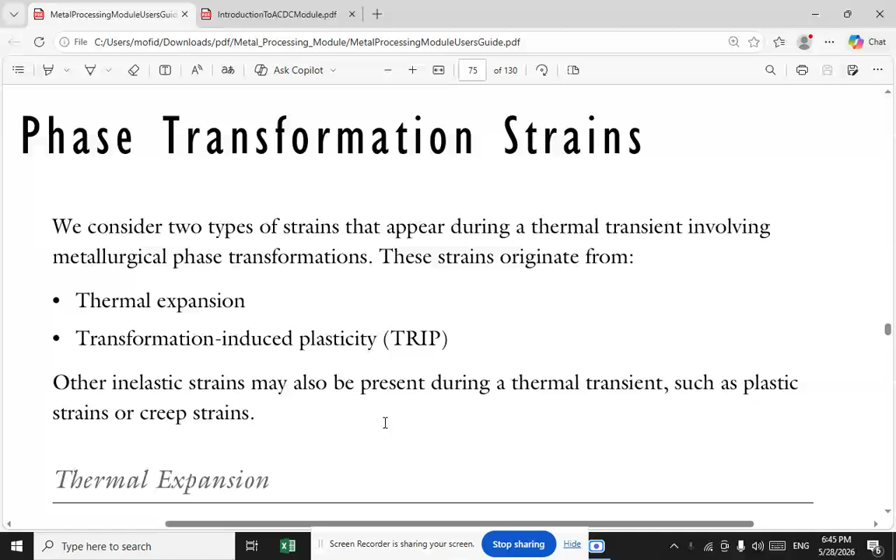We consider two types of strains that appear during a thermal transient involving metallurgical phase transformations. These strains originate from thermal expansion and transformation-induced plasticity. Other inelastic strains may also be present during a thermal transient, such as plastic strains or creep strains.

Now I want to go through thermal expansion. It is well known that different metallurgical phases occupy different volumes at a given temperature. For example, when austenite transforms into martensite, the thermal contraction due to cooling is accompanied by a volumetric expansion when the martensite begins to form.

There are two formulations for computing thermal strains in the compound material. The strain-based formulation uses a phase fraction weighted sum of the thermal strains of each phase. The density-based formulation uses the change in density during temperature change and phase transformation.

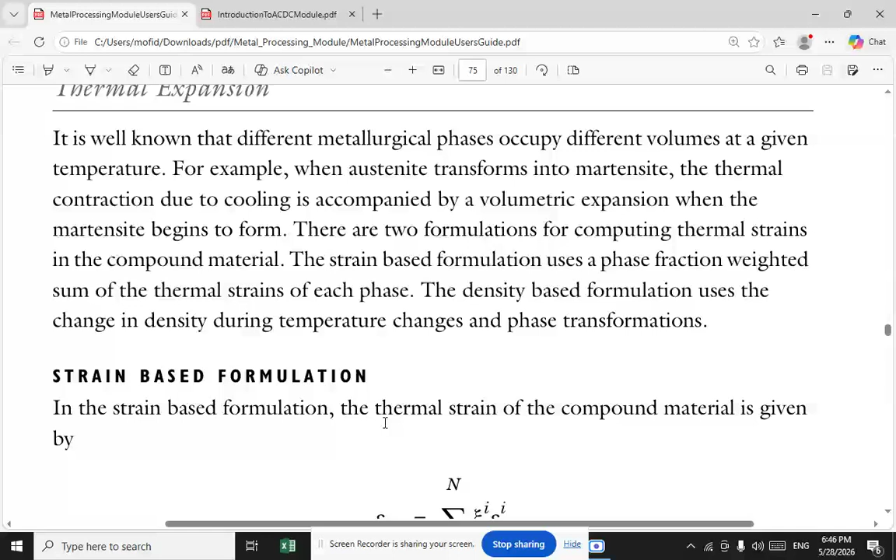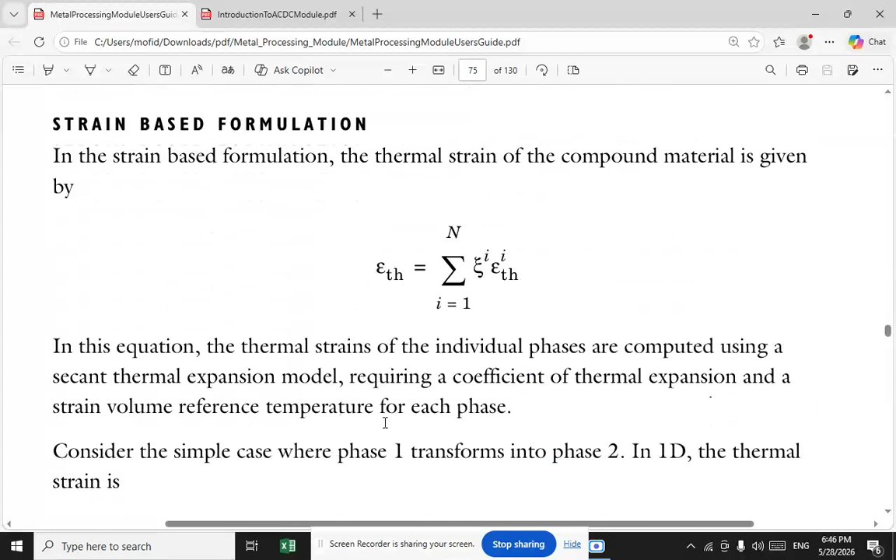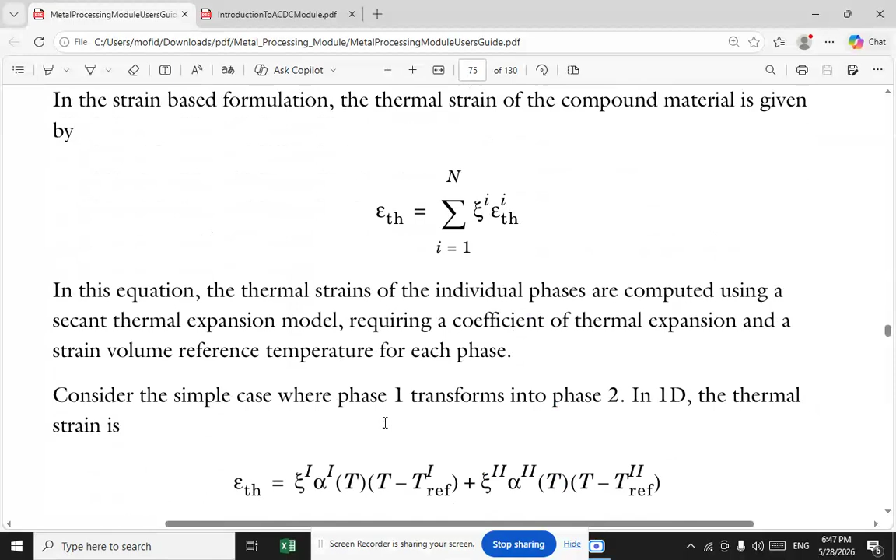Now I'm about to go to the strain-based formulation. In this formulation, the thermal strain of the compound material is given by epsilon TH, equal to the sum from I equals 1 to n of xi to the power of I times epsilon TH to the power of I. In this equation, the thermal strains of the individual phases are computed using a secant thermal expansion model requiring a coefficient of thermal expansion and a strain volume reference temperature for each phase.

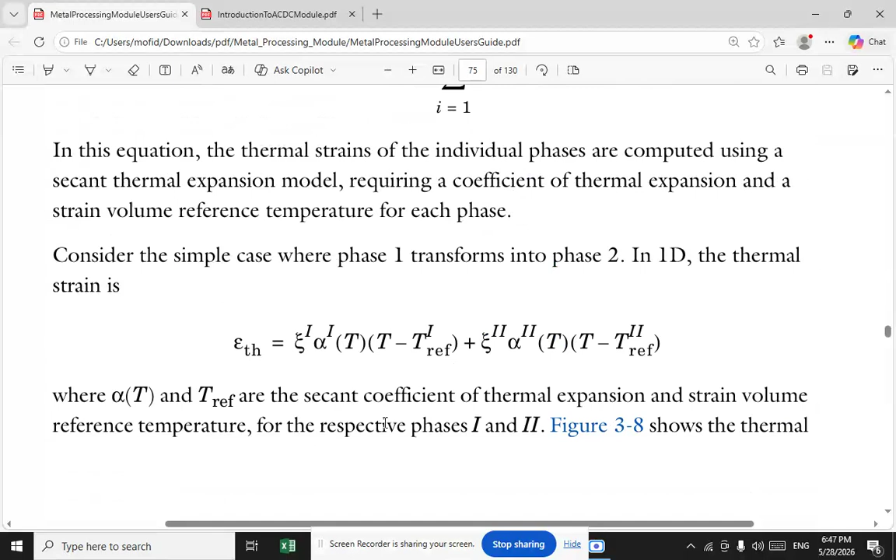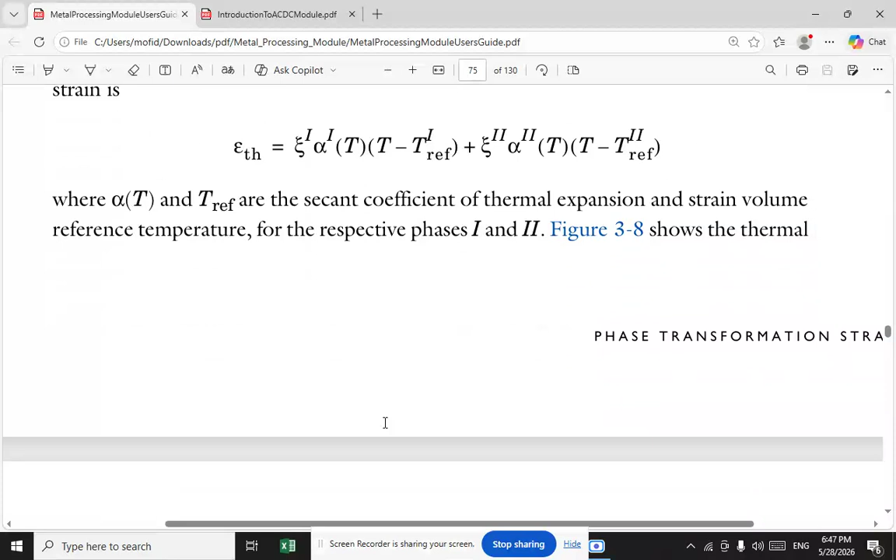Consider the simple case where phase 1 transforms into phase 2. In one dimension, the thermal strain is as below, where alpha T and T temperature reference are the secant coefficient of thermal expansion and strain volume reference temperature for the respective phases 1 and 2. Figure 3-8 shows the thermal strain. For simplicity, the coefficients of thermal expansion for the two phases in the figure are constant but different.

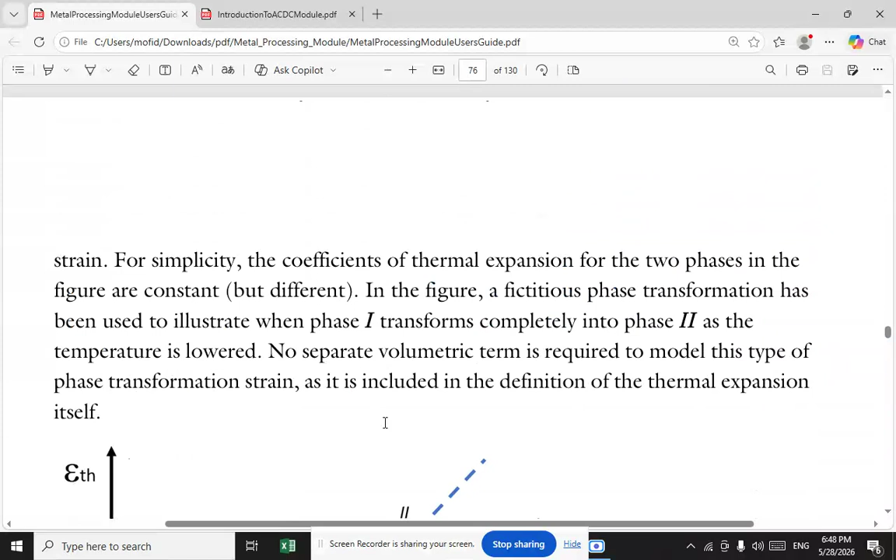In the figure, a fictitious phase transformation has been used to illustrate when phase 1 transforms completely into phase 2 as the temperature is lowered. No separate volumetric term is required to model this type of phase transformation strain, as it is included in the definition of the thermal expansion itself. Figure 3-8 illustrates the strain-based formulation for the thermal strains.

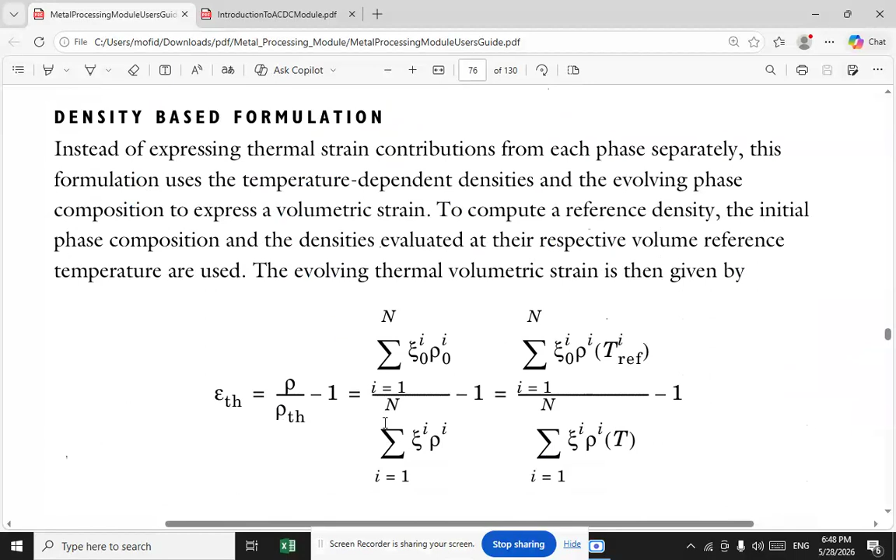Now I want to go through the density-based formulation. Instead of expressing thermal strain contributions from each phase separately, this formulation uses the temperature-dependent densities and the evolving phase composition to express a volumetric strain. To compute its reference density, the initial phase composition and the densities evaluated at their respective volume reference temperature are used. The evolving thermal volumetric strain is then given by this formulation.

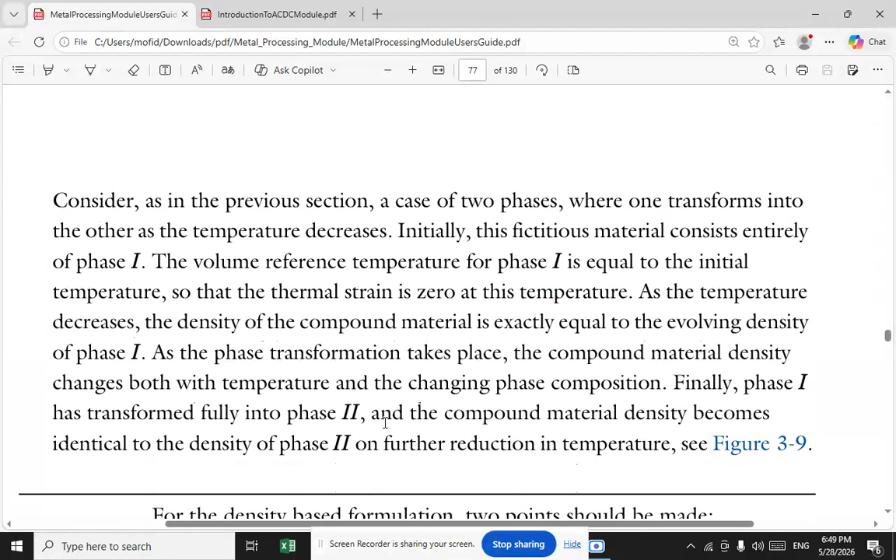Consider, as in the previous section, a case of two phases where one transforms into the other as the temperature decreases. Initially, this fictitious material consists entirely of phase 1. The volume reference temperature for phase 1 is equal to the initial temperature, so the thermal strain is zero at this temperature. As temperature decreases, the density of the compound material is exactly equal to the evolving density of phase 1. As the phase transformation takes place, the compound material density changes both with temperature and the changing phase composition. Finally, phase 1 has transformed fully into phase 2, and the compound material density becomes identical to the density of phase 2 on further reduction in temperature.

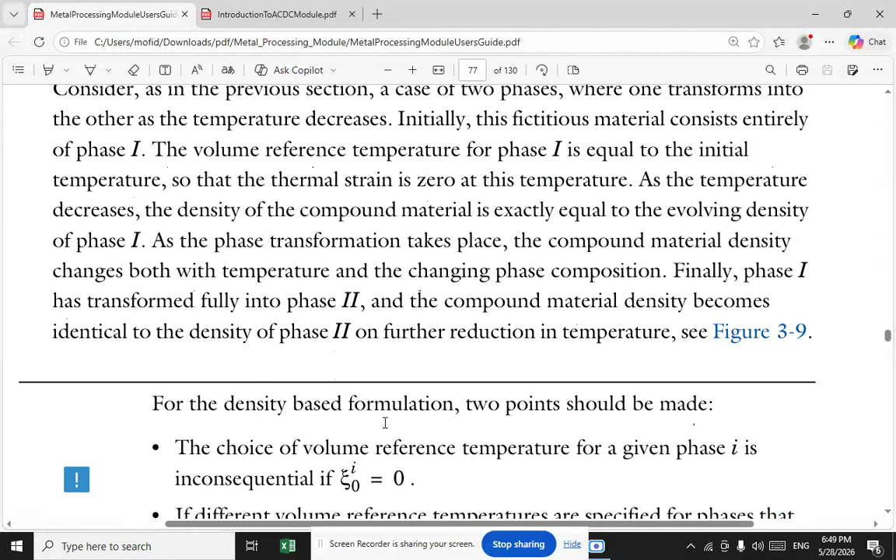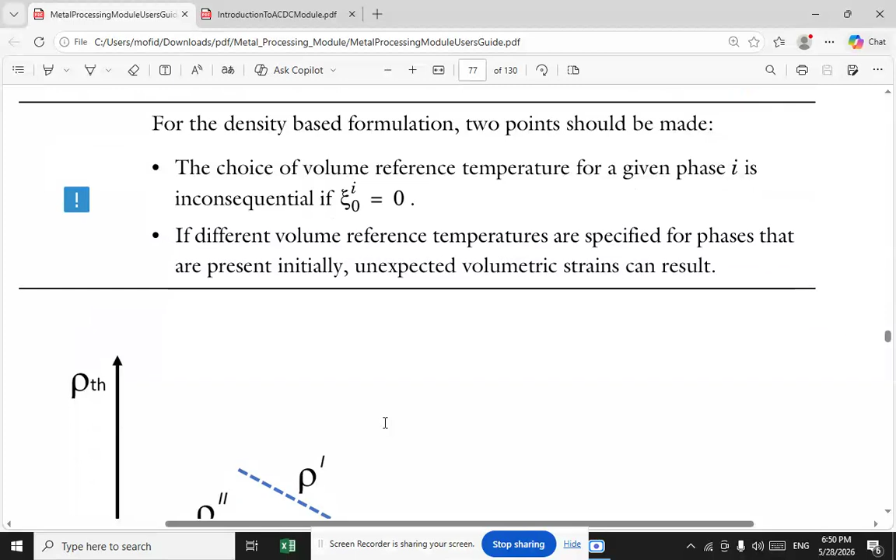See figure 3-9. For the density-based formulation, two points should be made. The choice of volume reference temperature for a given phase I is inconsequential if xi zero to the power of I is equal to zero. If different volume reference temperatures are specified for phases that are present initially, unexpected volumetric strains can result. Figure 3-9 illustrates the density-based formulation for thermal strains.

Now I want to go through transformation-induced plasticity. Plastic strains in metal result from deviatoric stresses that exceed the yield strength of the material. However, during phase transformations, inelastic strains may appear already at smaller stress levels. This transformation-induced plasticity, or TRIP, is therefore different from classical plasticity in that it doesn't involve a yield criterion, and it appears at a stress level that would otherwise be insufficient to cause plastic straining, even in the softest of the phases.

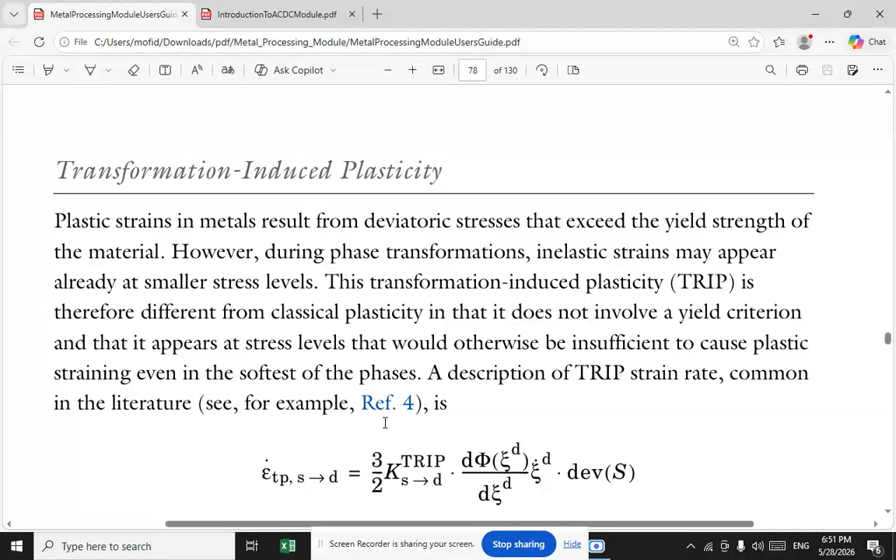A description of TRIP strain rate is common in the literature, see for example reference 4, and the formulation is such that the strain rate is proportional to the deviatoric part of the second Piola-Kirchhoff stress tensor S, through the transformation-induced plasticity parameter K, raised to the power TRIP.

The derivative of the saturation function phi xi to the power of d and the rate of formation of the destination phase xi to the power of d values for the transformation induced plasticity parameter K s tends to d to the power of TRIP will depend on the type of the phase transformation. It can depend, for example, on carbon content and temperature. See reference 5 and reference 6.

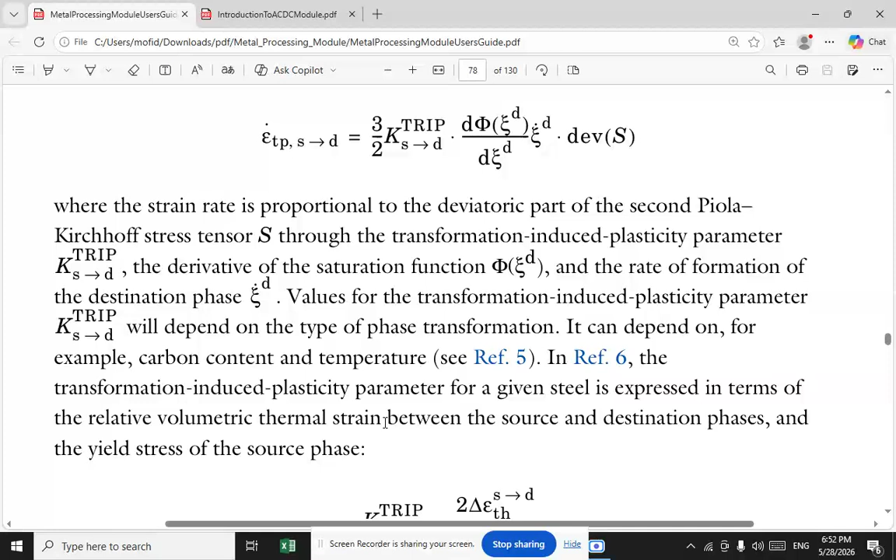The transformation induced plasticity parameter for a given steel is expressed in terms of the relative volumetric thermal strain between the source and destination phases and the yield stress of the source phase. The strain term in the expression above is the axial thermal strain difference between the source and destination phases in terms of the temperature-dependent densities of the source and destination phases.

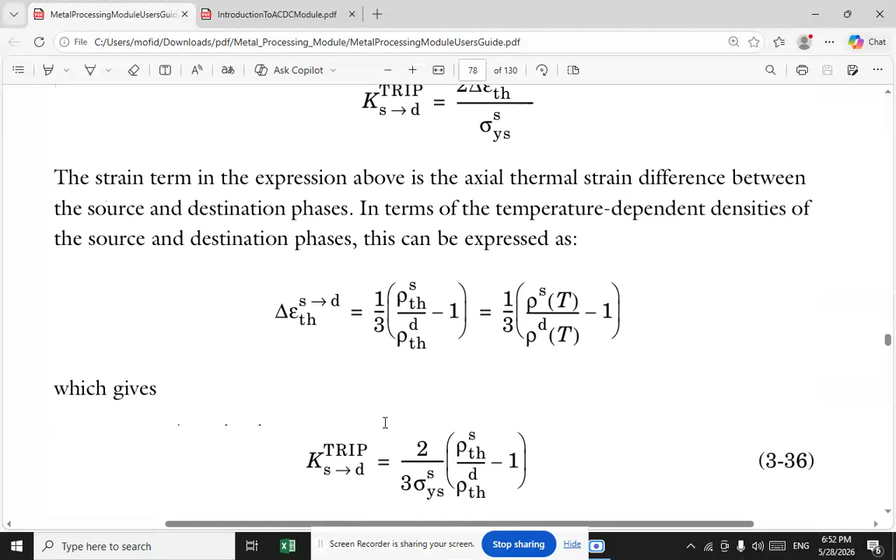This can be expressed as follows, which gives K s tends to d to the power of TRIP is equal to 2 divided by 3 multiplied by sigma ys to the power of s multiplied by rho to the power of s divided by rho to the power of d, minus 1.

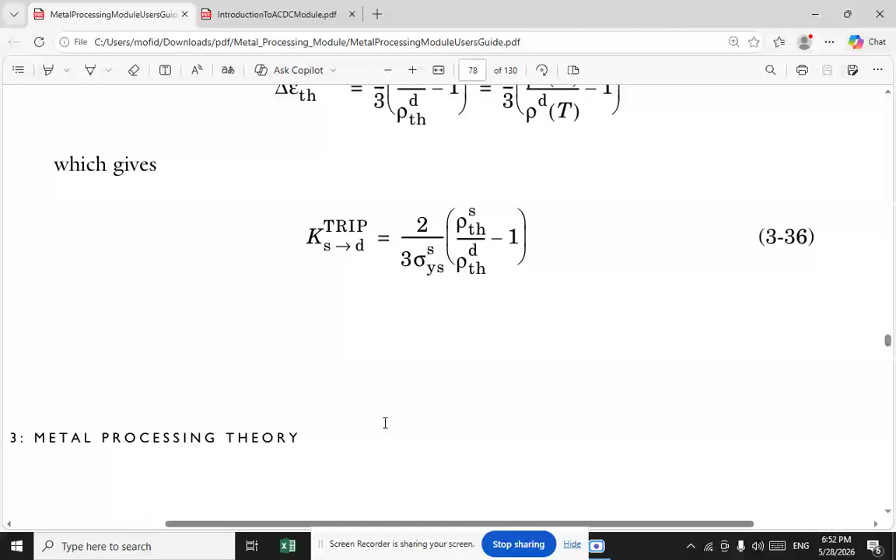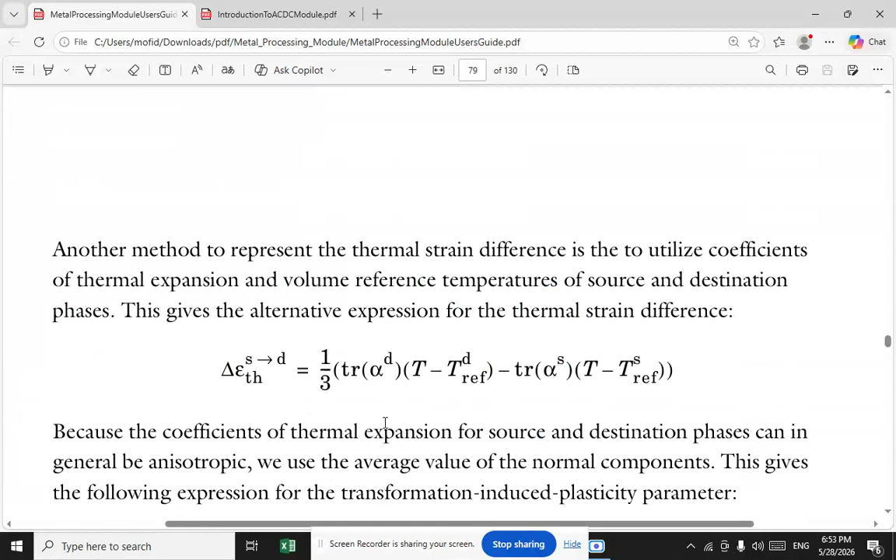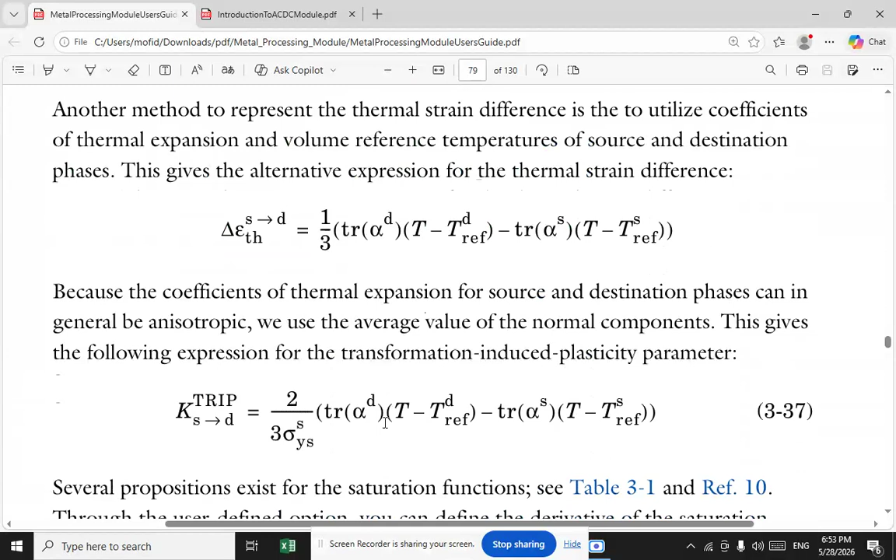Another method to represent the thermal strain difference is to utilize coefficients of thermal expansion and volume reference temperatures of the source and destination phases. This gives an alternative expression for the thermal strain difference, because the coefficient of thermal expansion for source and destination phases can in general be anisotropic, we use the average value of the normal components. This gives the following expression for the transformation-induced plasticity parameter.

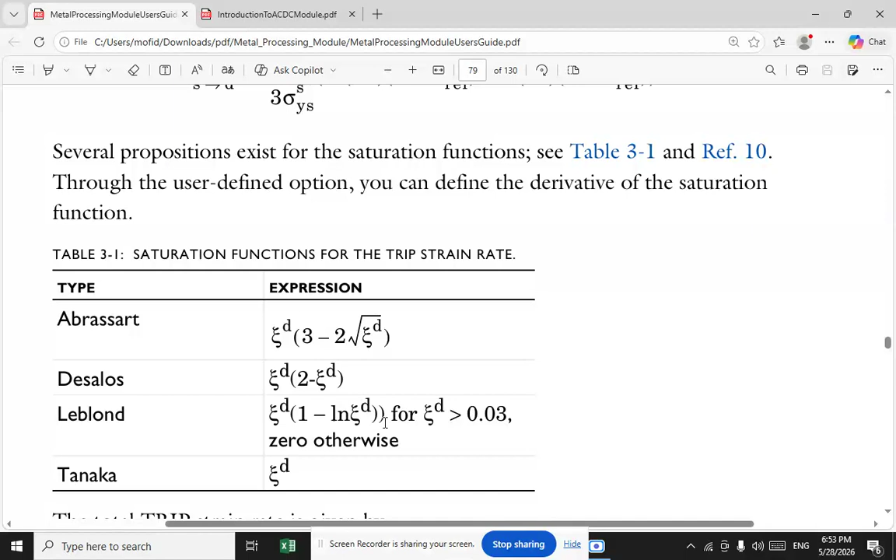Several propositions exist for the saturation functions, table 3-1, and reference 10. Through the user-defined option, you can define the derivative of the saturation function. Table 3-1 illustrates saturation functions for the trip strain rate. The type is Abrassart and the expression is such that there are also other types available.

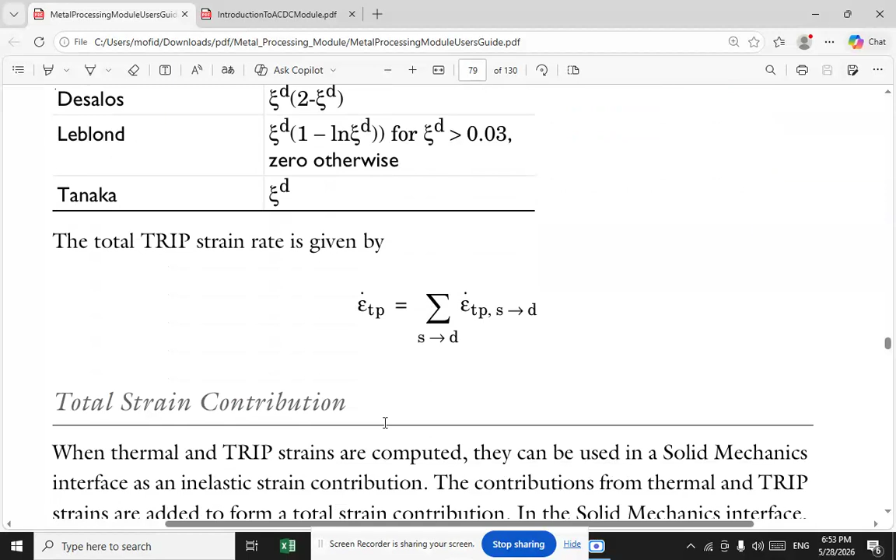The total TRIP strain rate is given by this formulation. Now I want to go through this total strain contribution. When the thermal and TRIP strain are computed, they can be used in solid mechanics interfaces as an inelastic strain contribution.

The contributions from the thermal and TRIP strains are added to form a total strain contribution in the solid mechanics interfaces. This contribution is used additively in the case of an additive strain definition, or used to form an inelastic deformation gradient contribution in the case of geometric nonlinearity with nonlinear strains. See the inelastic strain contributions. In the latter case, the contribution is used

multiplicatively. Now I want to go to the phase transformation latent heat. The heat rate Q0 that is released during a phase transformation is characterized by the enthalpy per unit volume, delta H, s to d. See reference 5. The heat rate that is associated with the transformation of a source phase into a destination phase can be expressed as

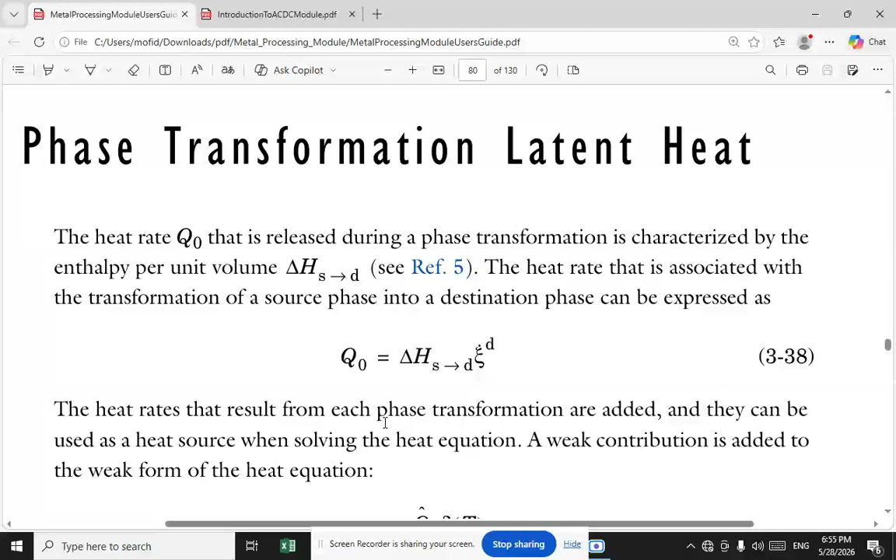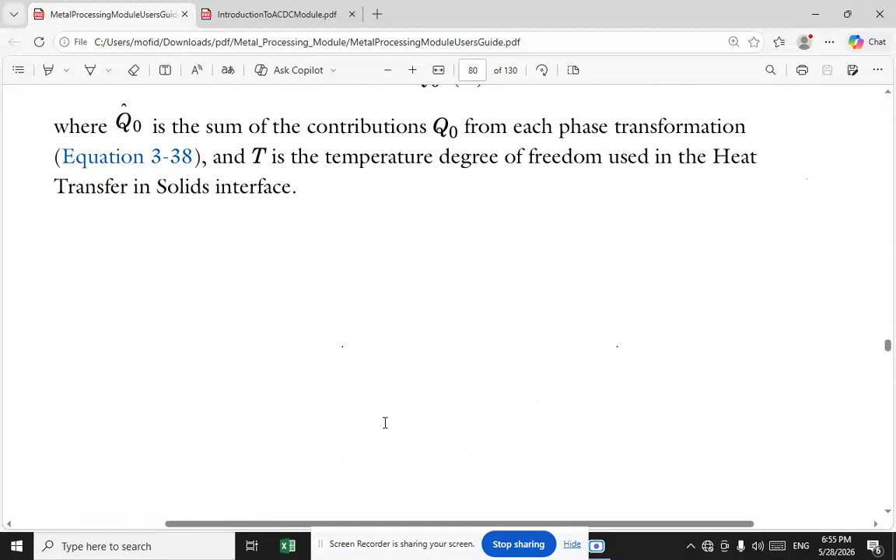Q0 is equal to delta enthalpy S tends to the xi dot to the power of d. The heat rates that result from each phase transformation are added, and they can be used as a heat source when solving the heat equation. A weak contribution is added to the weak form of the heat equation, where Q0 is the sum of the contributions Q0 from each phase transformation, equation 3-38, and T is the temperature degree of freedom used in the heat transfer in solids interface.

Now I want to go through carburization. Carburization is a heat treatment process where a component is placed in a carbon-rich atmosphere at an elevated temperature. During the process, carbon diffuses into the surface of the component, and the carbon concentration in the component changes with time as carbon continues to diffuse to the interior. The process of carburization is modeled using Fick's second law of diffusion.

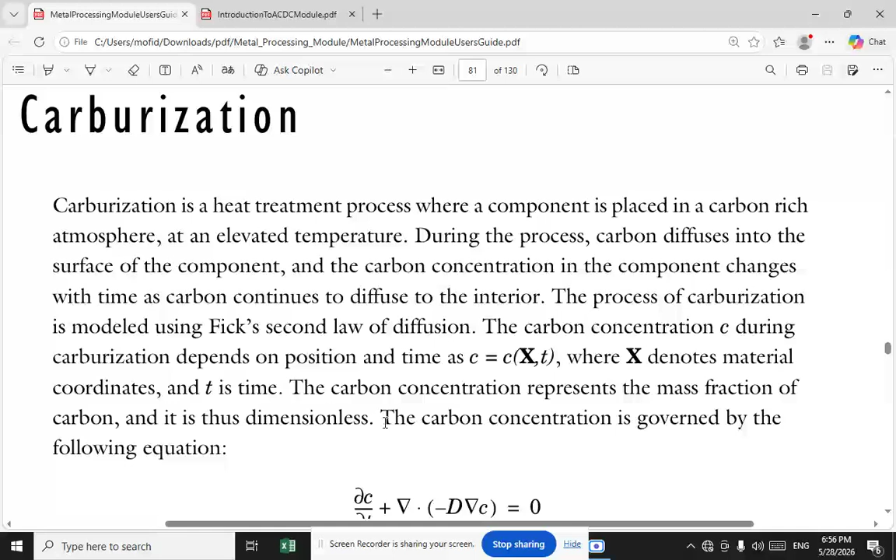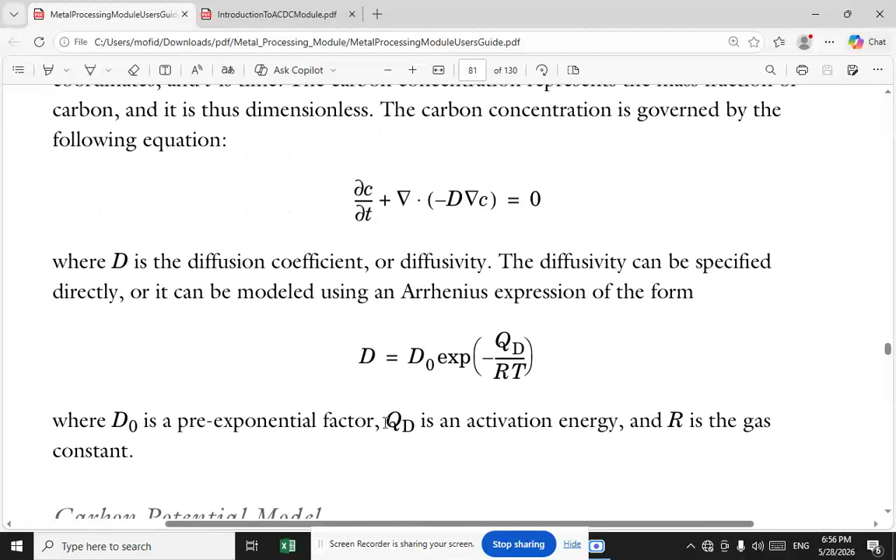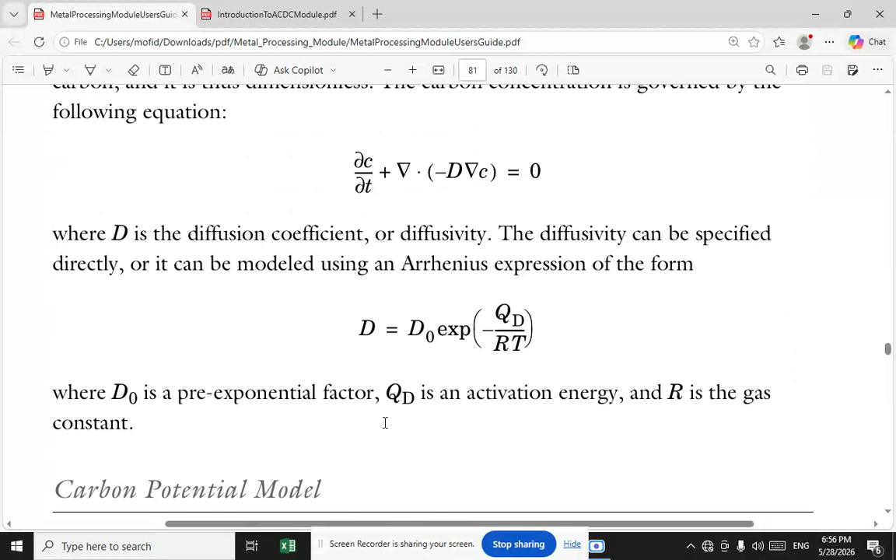The carbon concentration C during carburization depends on position and time, as C is equal to C(x,t), where x denotes material coordinates and t is the time. The carbon concentration represents the mass fraction of carbon, and it is thus dimensionless. The carbon concentration is governed by the following equation: the derivative of concentration with respect to time, plus the divergence of minus D gradient C, is equal to 0, where d is the diffusion coefficient or diffusivity. The diffusivity can be specified directly, or it can be modeled using an Arrhenius expression of the form as follows, where d0 is a pre-exponential factor, q is an activation energy, and r is the gas constant.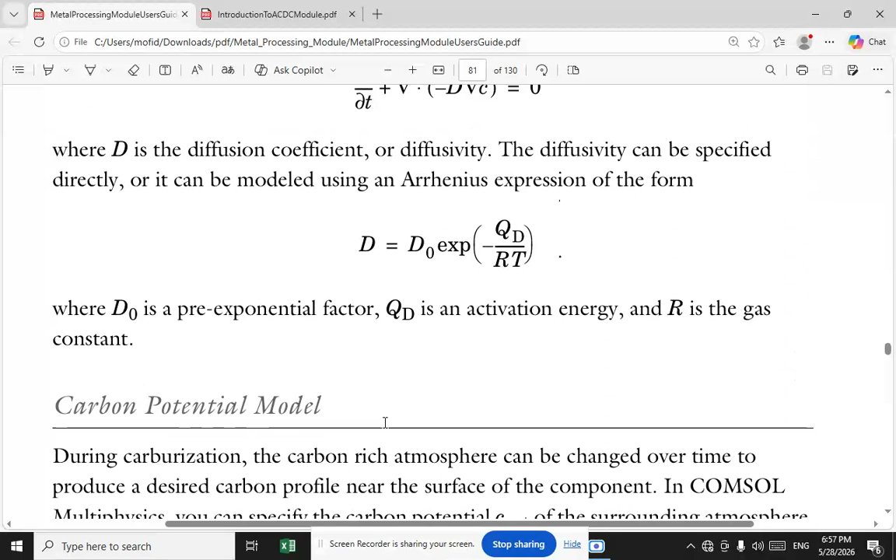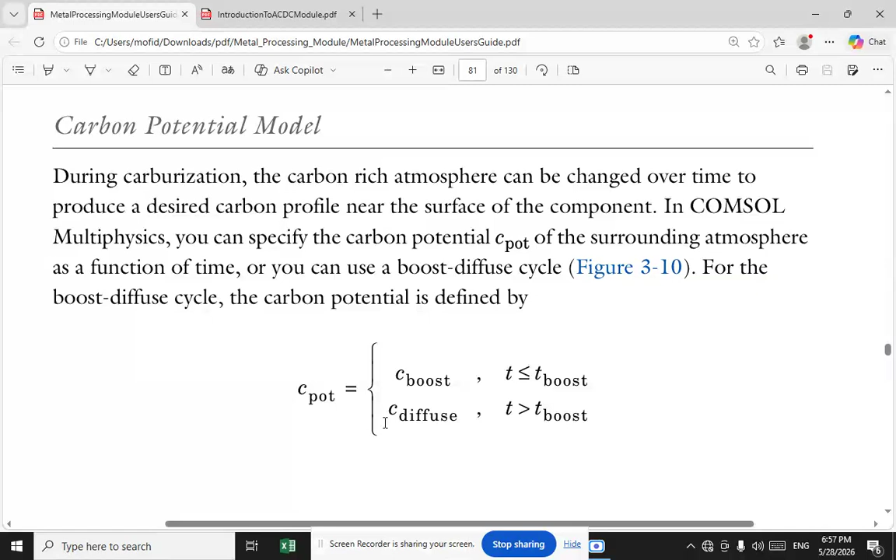Now I want to go to the carbon potential model. During carburization, the carbon-rich atmosphere can be changed over time to produce a desired carbon profile near the surface of the component. In COMSOL Multiphysics, you can specify the carbon potential, C potential, of the surrounding atmosphere as a function of time, or you can use a boost-diffuse cycle, figure 3-10. For the boost-diffuse cycle, the carbon potential is defined by this formulation.

Now I want to go to figure 3-10, which represents the boost diffuse cycles.

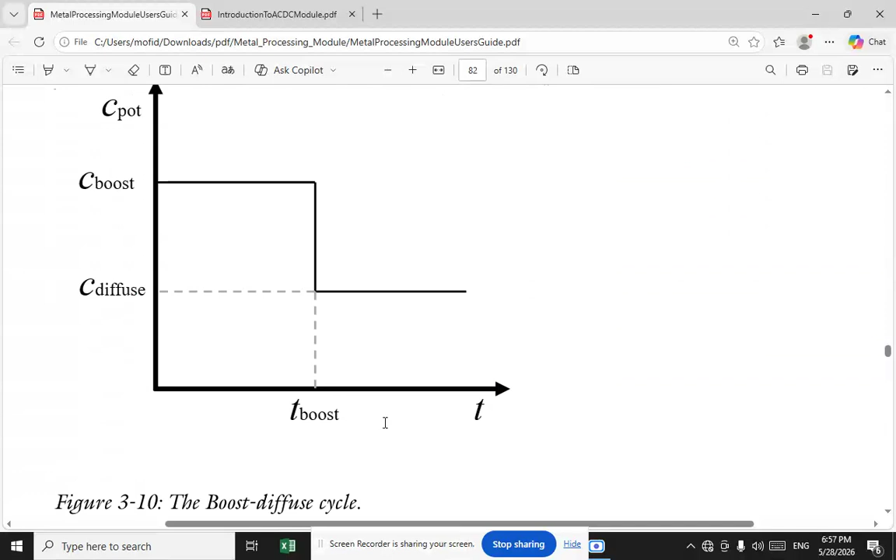Boundary conditions section: when a component is subjected to an environment of different carbon concentration, carbon can diffuse into or out from its surface. This mass transfer can be modeled in two ways. The first one is prescribed carbon flux.

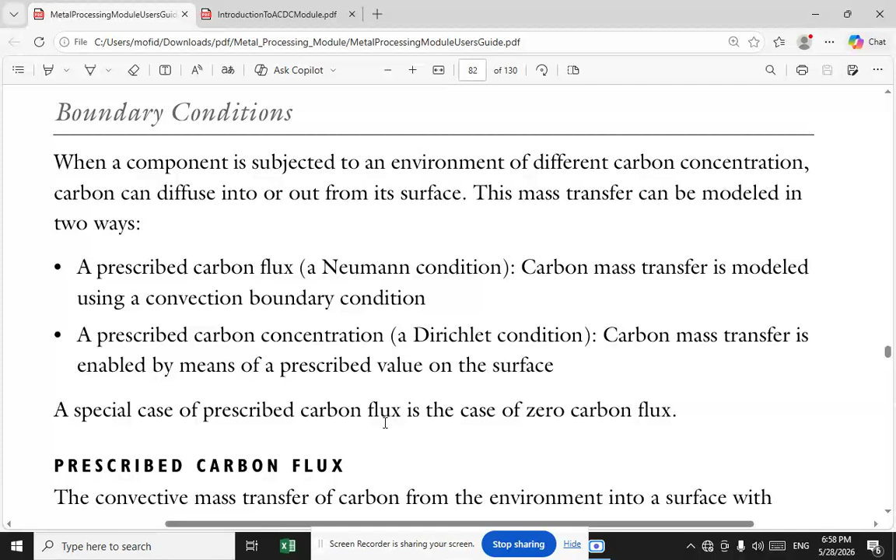A Neumann condition carbon mass transfer is modeled using a convection boundary condition. A prescribed carbon concentration, or Dirichlet condition, carbon mass transfer is enabled by means of a prescribed value on the surface. A special case of prescribed carbon flux is the case of zero carbon flux.

For prescribed carbon flux, the convective mass transfer of carbon from the environment into a surface with outward normal n is given by this formulation, where B is the mass transfer coefficient and C ext is the carbon concentration of the exterior. A natural way to define the carbon concentration of the exterior is to take it as equal to the carbon potential, C potential, of the surrounding carburizing atmosphere.

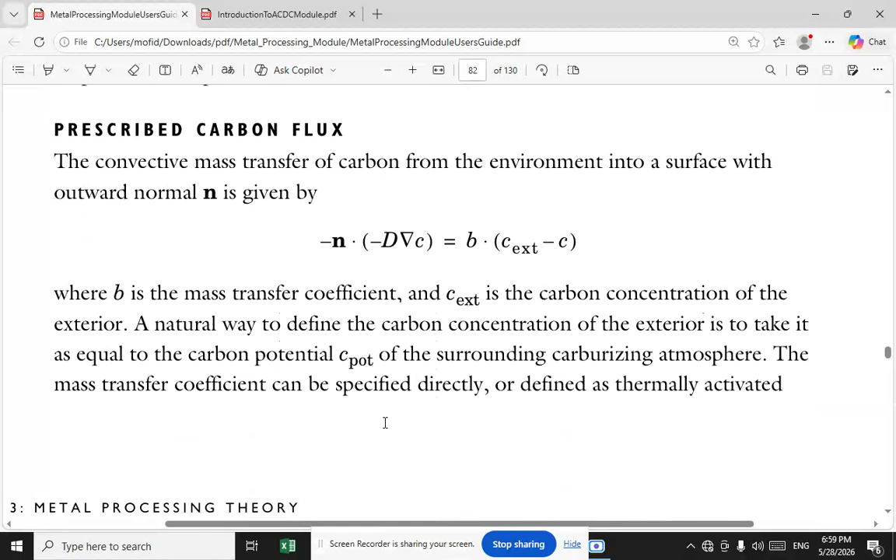The mass transfer coefficient can be specified directly or defined as thermally activated, such as follows, where B0 is a pre-exponential factor and QB is an activation energy. In a given situation, these quantities would have to be estimated or measured experimentally.

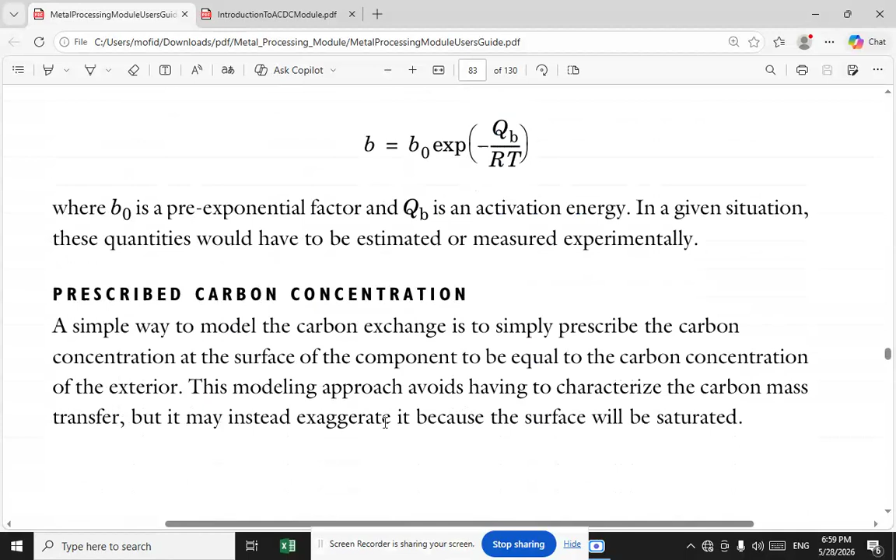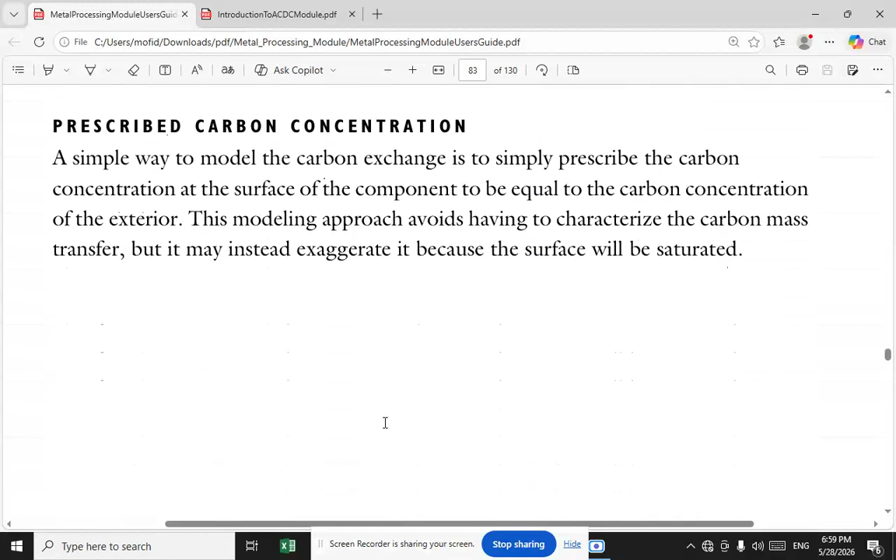Now I want to go through the prescribed carbon concentration. A simple way to model the carbon exchange is to simply prescribe the carbon concentration at the surface of the component to be equal to the carbon concentration of the exterior. This modeling approach avoids having to characterize the carbon mass transfer, but it may instead exaggerate it because the surface will be saturated.

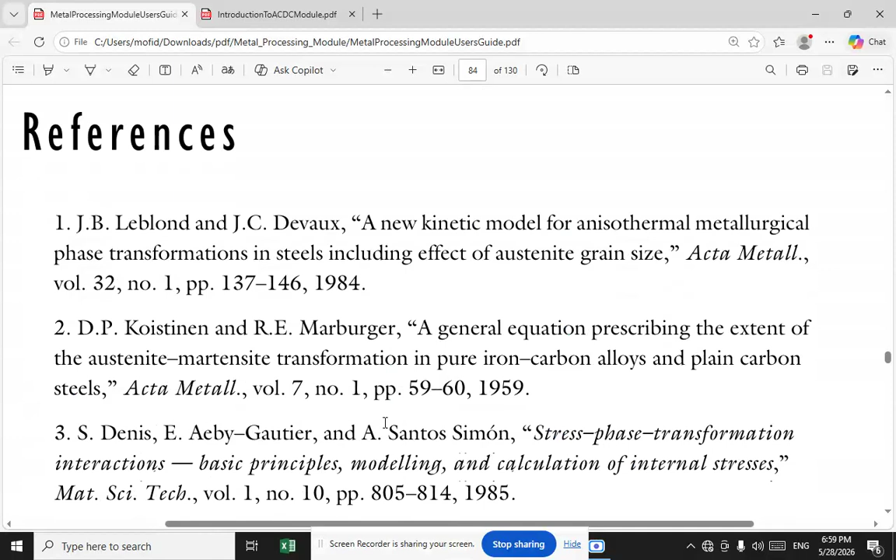I read literature for you. The first was written by Leblond and Devaux, titled 'A New Kinetic Model for Anisothermal Metallurgical Phase Transformation in Steels, Including Effect of Austenite Grain Size.' The next one, Koistinen and Marburger, 'General Equation Prescribing the Extent of the Austenite and Martensite Transformation.'

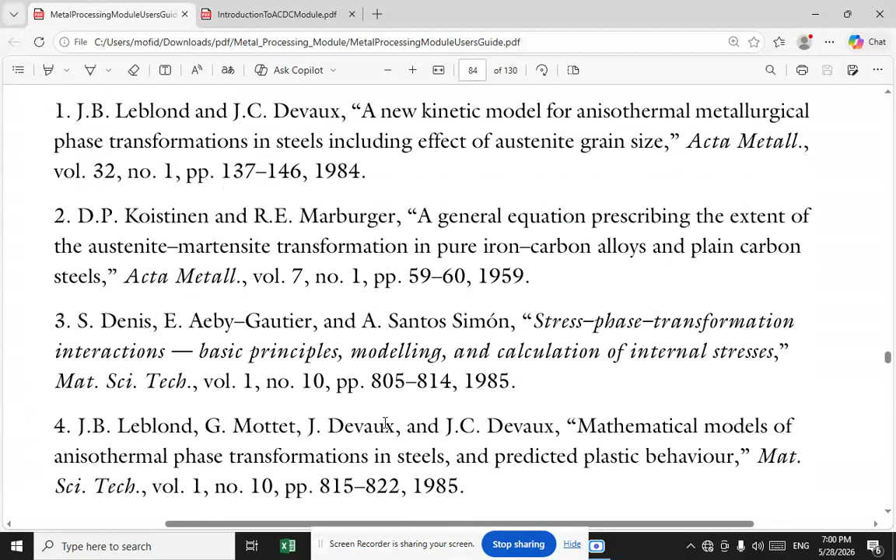...in Pure Iron Carbon Alloys and Plain Carbon Steels. The next is Denis Gautier, 'Stress Phase Transformation Interactions: Basic Principles, Modeling and Calculation of Internal Stresses.' The next was written by DeVaux, 'Mathematical Models of Anisothermal Phase Transformation in Steel and Predicted Plastic Behavior.'

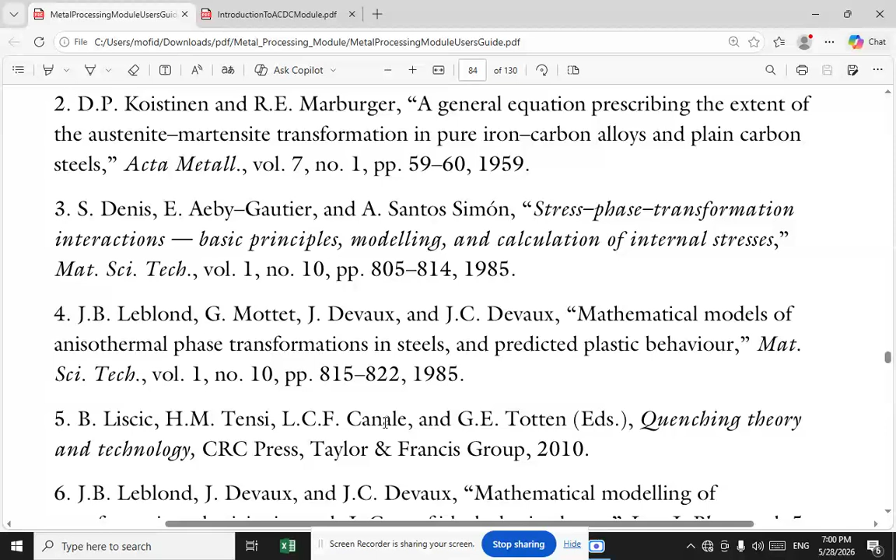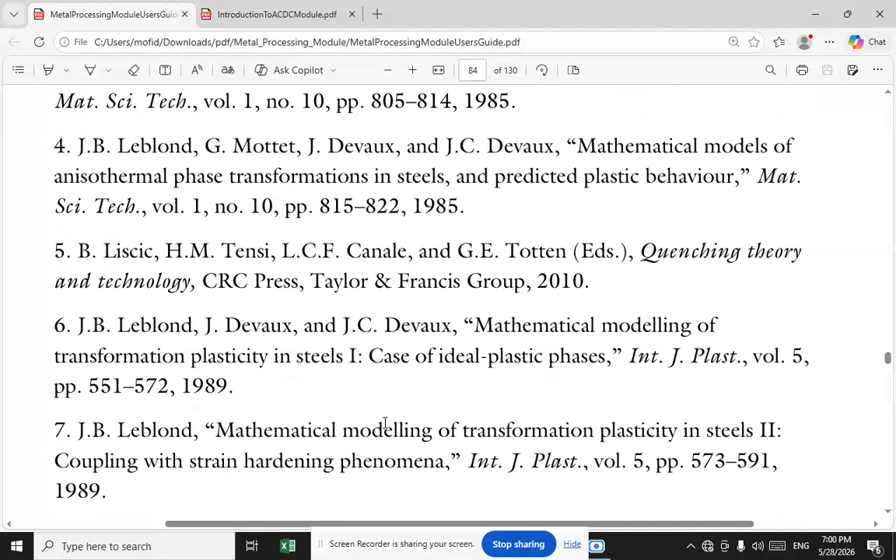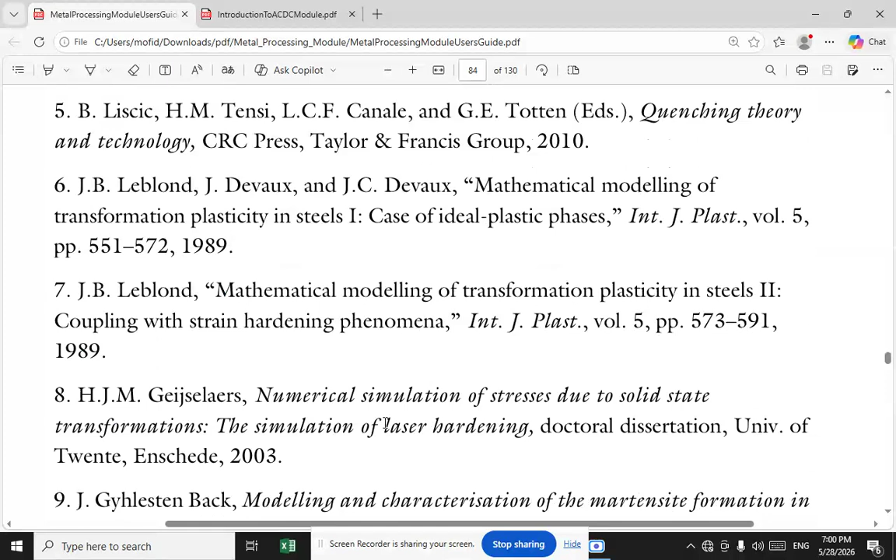The next was written by Liscic, 'Quenching Theory and Technology.' The next was written by DeVaux, 'Mathematical Modeling of Transformation Plasticity in Steel.' The next was written by Leblond, 'Mathematical Modeling of Transformation Plasticity in Steel 2, Coupling with Strain Hardening Phenomena.'

The next was written by Geijselaers, 'Numerical Simulation of Stress due to Solid State Transformations, the Simulation of Laser Hardening,' a doctoral dissertation.

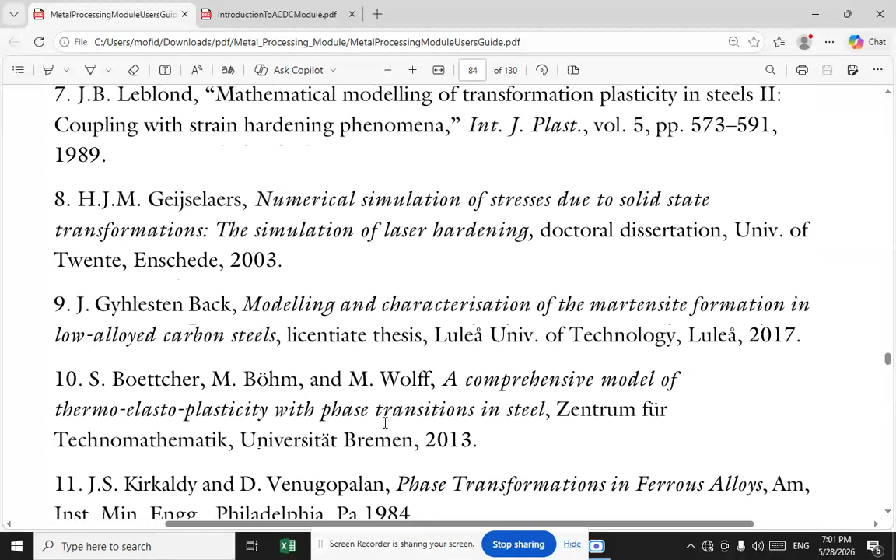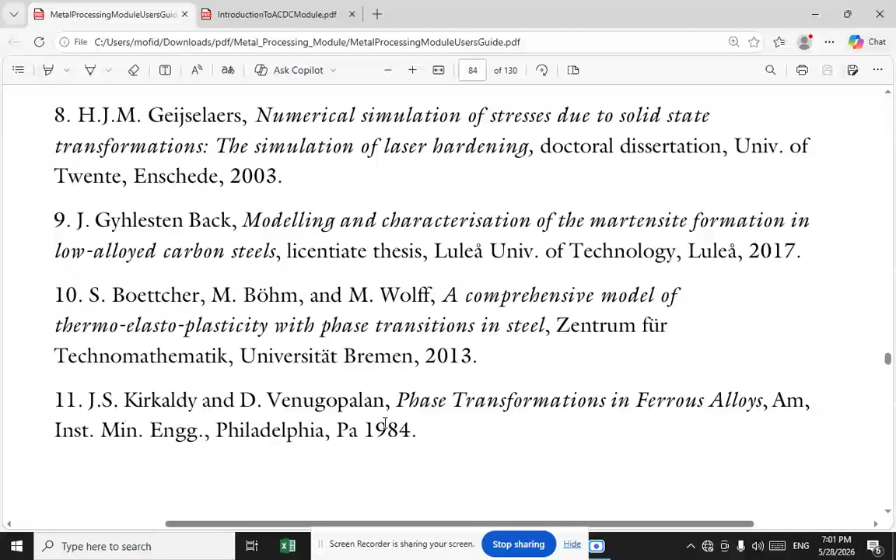The next was written by Gyhlesten Back, 'Modeling and Characterization of Martensite Formation in Low Alloyed Carbon Steels.' The next one was written by Boettcher, 'Comprehensive Model of Thermoelastoplasticity with Phase Transitions in Steel.'

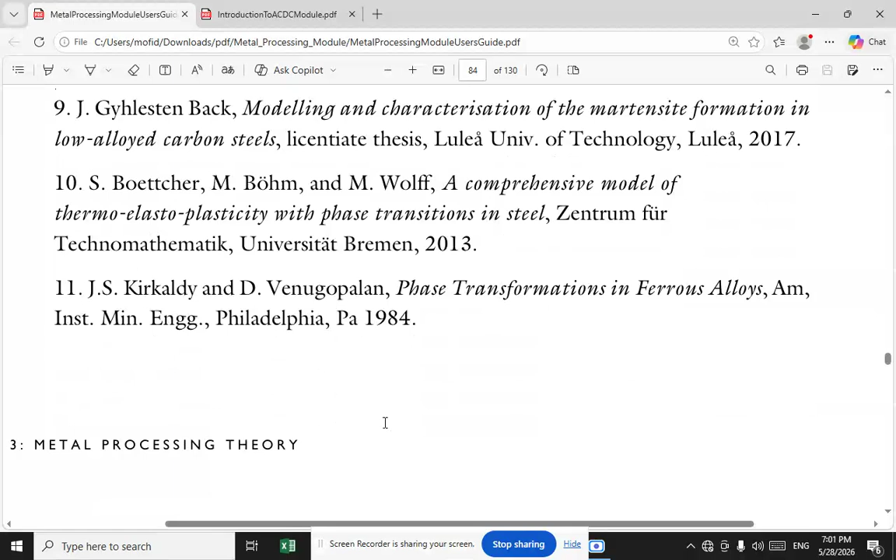The next was written by Kirkaldy and Venugopalan, 'Phase Transformations in Ferrous Alloys.' The next one is written by Meekisho, 'Computational Model for the Prediction of Steel Hardenability.'

The next one is written by Oldenburg, 'Austenite Decomposition during Press Hardening of Boron Steel, Computer Simulation and Test.' The next was written by Andrews, 'Empirical Formulae for the Calculation of Some Transformation Temperatures.'

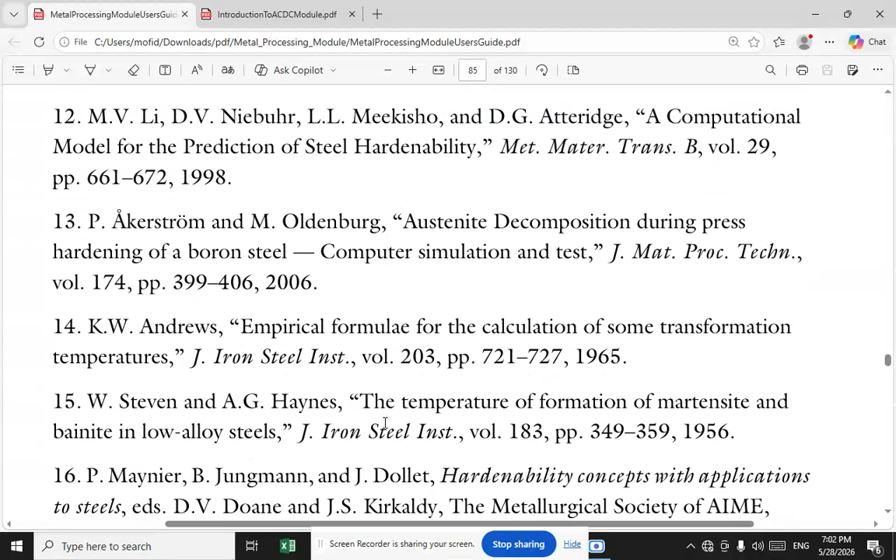The next was written by Steven and Haynes, 'Temperature Formation of Martensite and Bainite in Steels.' The next one was written by Maynier and Jungmann, 'Hardenability Concepts with Applications to Steel.'

The next was written by ASTM Standard, 'Standard Hardness Conversion Tables for Metals, Relationship Among Brinell Hardness...'

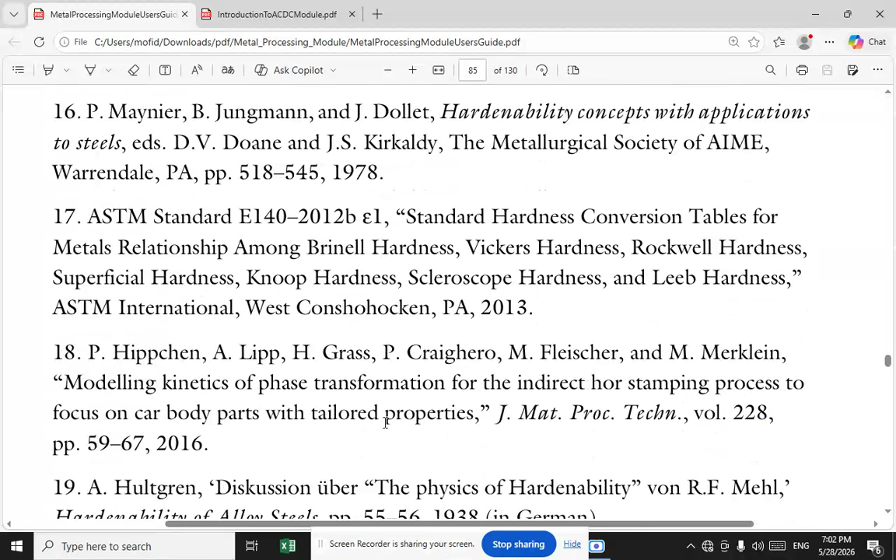The next was written by Hippchen, 'Modeling Kinetics of Phase Transformation for the Indirect Hot Stamping Process, Focus on Car Body Parts with Tailored Properties.'

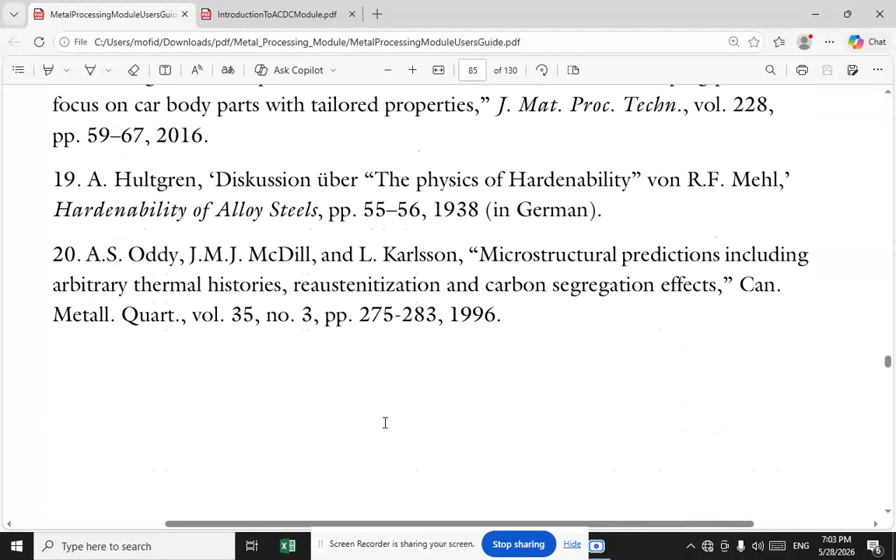The next one was written by Hultgren, 'Discussion über die Physics Hardenability,' and the next one was written by Oddy, McDill and Karlsson, 'Microstructural Predictions, Including Arbitrary Thermal Histories, Reaustenitization, and Carbon Segregation Effect.'